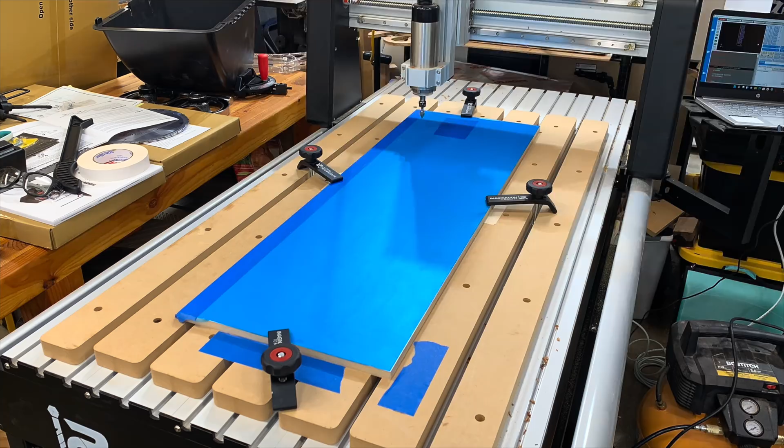So the biggest factor with MDF is priming and really painting, right? It absorbs so much paint so quickly. You're just gonna have to keep sanding, repaint, reprime it. That'll take you some time, and it's also weather dependent. Then at this point, I'm adding some masking. I'll talk more about this Oramask material later in the video and some considerations, but it really does a great job to help get a really crisp line. And then here I am loading up the machine, loading the file, and then carving away.

The other thing about MDF is it is the biggest offender when it comes to sawdust. I didn't have the dust shoe or the boot hooked up here, and it was just fine. You're just gonna have to keep an eye on it, but just be aware of that, right? But it cuts super clean. MDF cuts really well. There's not too much sanding that's gonna be required afterwards.

It is a very inexpensive material to use, and so it is preferred by a lot of folks, but some extra work with painting. And so here I'm just doing a quick clear coat, then adding some more of that filler primer, and then adding my color, some black. Make sure it dries, let this all dry before you peel it off.

But here I am peeling it off. This is super satisfying. You're gonna see how crisp those letters are, and it just really cuts so well. Downside is when you rush a job and you don't wait for the paint to cure and then peel the plastic and the masking off, you ruin the paint job like you see here.

And so at this point I'm like, awesome, super. But I just forged ahead and pulled off all of the masking with the little tool here, made quick work of it. And to see what I got, I decided to pivot, and I just went rustic. That's what woodworkers do, and so I distressed it a little bit more, did some more sanding, and I went ahead and called it rustic.

This was a practice project after all, and you know what? It turned out okay. It wasn't what I was going for, but it was a decent look. So if you're going for that rustic, weathered look, rock it this way, and so that's an option for you. But it did turn out rather nicely. I'm a fan of how it looked with a nice frame.

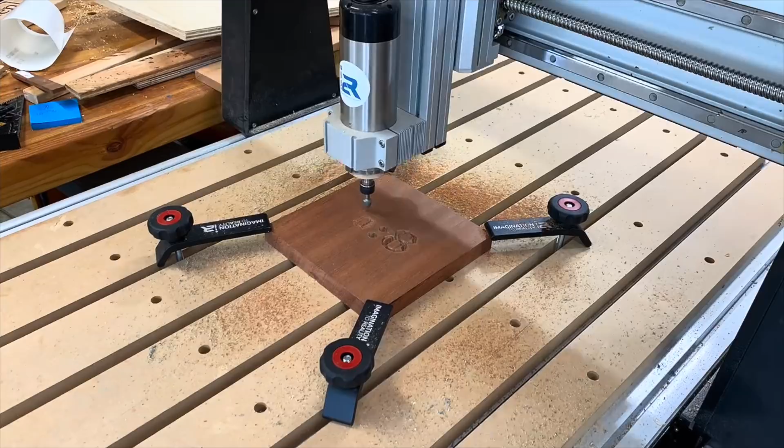Using hardwoods. Hardwoods are amazing, and that's really what I envision myself doing mostly. And so here I've just got a piece of Jatoba, Brazilian cherry, and it carved out really nicely. And because these hardwoods are hard and dense, the grain structure, there's not as much sanding required. You're probably going to need a wire brush just to get some little nibs and little particles there, but it cuts super clean right off the machine bed.

And then go ahead and lay a clear coat down. This is really important if you're going to add any spray paint. You want to seal the grain. And so now that I've sealed the grain with the lacquer, now I can flood it with black. Same thing here. I'm going to seal all of the grain with a clear coat, just some kind of lacquer, and that way my paint color is not going to bleed into the wood grain and not come off.

Now that it's sealed, let it dry. Now I can flood it with whatever color I want. So here, going with white, or the other one with black. And so flood it. Make sure you wait for the paint to dry. Once that paint has dried, then you can go about sanding. If not, you're going to get some of that sawdust in there.

Here I just paused to show, again, you can make it look rustic if you want. This is a look for some, not for me. But if that's what you're going for, you could kind of make it look a little rustic, that is an option. But if you have a good sander, this doesn't take too long. You could use a drum sander, but then you have to mess with lines. So this didn't take too long at all, and it really does turn out rather nicely.

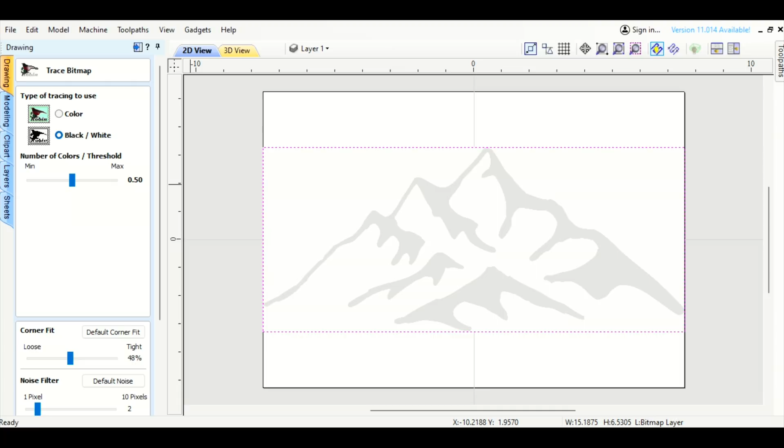And once I've got my mountain, I want to do this feature right here. So this is called Trace Bitmap. So right on over here, I'm going to click Trace Bitmap. And so the value of black and white, it's just that much easier. You can do color. Plenty of tutorials online how to do color, but I got my black and white clicked. Scroll on down, click preview, and then you can see I got my vectors. Click apply, close, good to go.

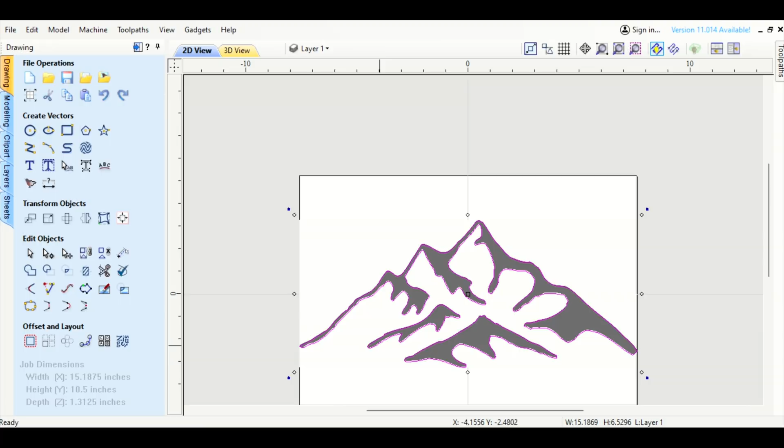Sometimes when you do this, you're going to get some weird little things, so you can zoom in and see if you have extra little nodes or whatnot that you can delete. Looks like I'm good here. But for my piece, I want to have both a picture and text. So I'm going to hold down the shift key so it's centering the picture, and I'm going to resize it. I already got my vectors, so I'm just going to get this out of the way. Good to go.

And we're going to go slower, you know, because the people are watching. There we go. All right.

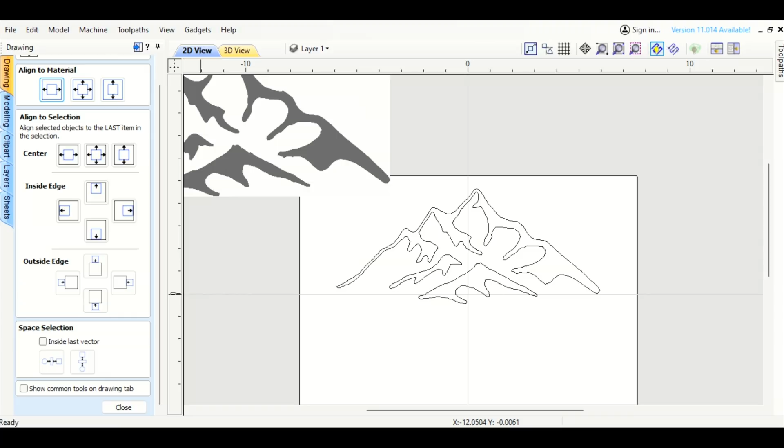And so I'm going to bring this kind of up top. I can recenter right here. Just use this feature to recenter and keep in position holding down the shift key. I'm going to make it a little bit bigger, and then let's bring it down just a skosh. Or let's not, because we're just going to jump ahead. All right, then I'm going to add in some text. So here we go.

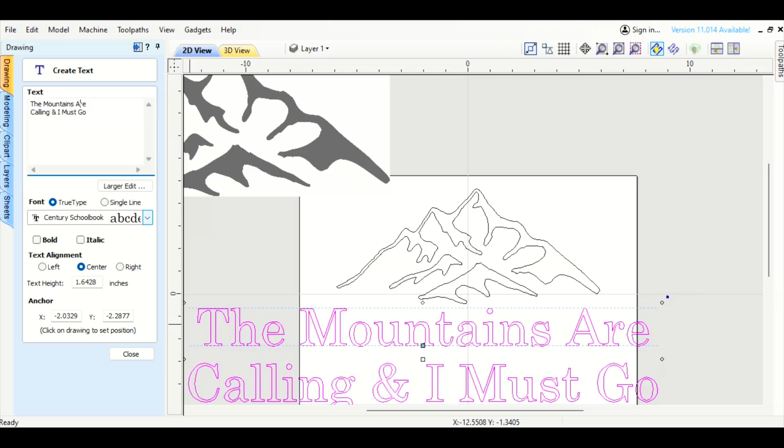We'll say "the mountains are calling, and I must go." So a little John Muir quote here in the Pacific Northwest. You know what? I'm happy with that font. I can change to a different font if I want, but you know what? I like it. I'm good with that.

Obviously, I need to resize. There are other ways to resize, but I'm going to go ahead and zoom out so I can see it. I'm going to shrink it, center it. Actually, I'm okay with this size. So this is just the image file. I'm gonna just delete it. I don't need it. I just need the vector.

And let's zoom in. All right, the mountains are calling and I must go. I'm happy with that. So I could then add in other features here. I could add in borders, but this is just simple for a tutorial. I'm going to click on the text and I'm going to do a VCarve toolpath. So then I click on toolpath and click on VCarve.

I've been using the 60-degree bit. You could certainly do a 90-degree bit. You would just select whatever you want. Start depth, I'm just going to leave it as is, 0, not messing with anything else here. That's all I have to do. Then I'm going to click calculate, and it's just going to run it through.

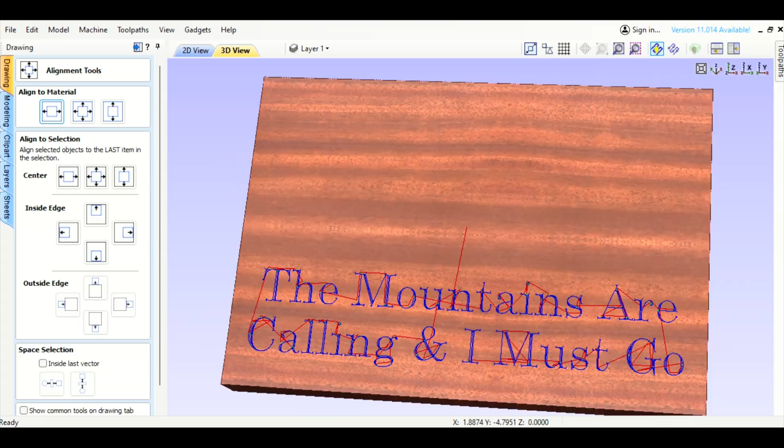It jumps into 3D carving mode so I can see what it looks like. Looks fabulous. So I'm going to go ahead, close. Not that I need to, but I'm going to rename this as text. All right, let's go back to 2D mode. And now I'm going to click on my picture. With my picture, I still want to do a VCarve, but I want to show you some other options. Under toolpaths, I could do a VCarve, which is what I'm going to end up doing for this piece.

But you could, like I mentioned earlier, use one of those other bits, whether it's the ball nose or the downcut bit. And then I would hit the pocket toolpath. I already have it in here. It's an end mill 1/16 inch. That's my downcut. I've set cut depth 5/100ths of an inch, so it's not going to go super deep. That way I get that nice pocket nice and clean, like I showed on that Star Wars sign earlier. That's how I did it, and then I would just click calculate, and it would calculate what it would look like.

However, I am going to show that VCarve option. I said earlier how I did a lot of this with just the VCarve. Still got the right vector selected. I could click flat depth. All of those Seattle sports signs I did, the Mariners logo and whatnot, I clicked flat depth. What that did is it didn't keep going until the full VCarve bit went all the way down to get the full V. I picked, again, like 5/100ths of an inch. So it went down a little bit, but it got flat. It doesn't have that deep recess. So that is an option.

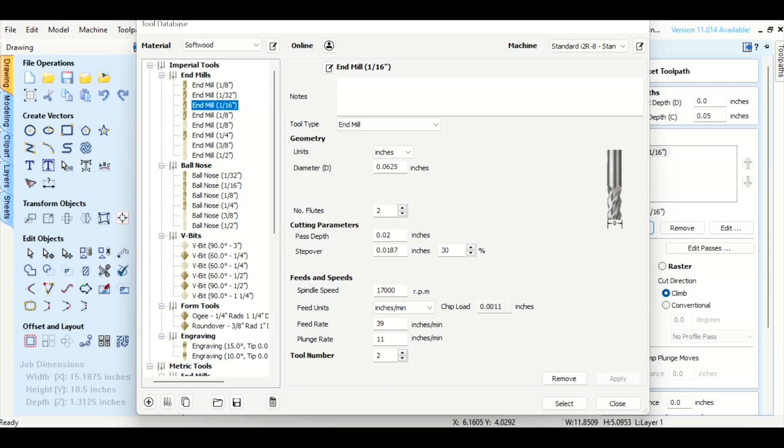Or you could do a pocket toolpath, and then you could select whatever bit. If I want to do a ball nose bit, that looked really clean, 1/16 of an inch, or I can do that end mill, that down cut. Down cut's going to be really clean. Then you would just click select, and again click calculate, and get a better idea of what this is going to look like. Let's go ahead and show it. Preview. All right, so it shows you what it's going to look like here with the profile.

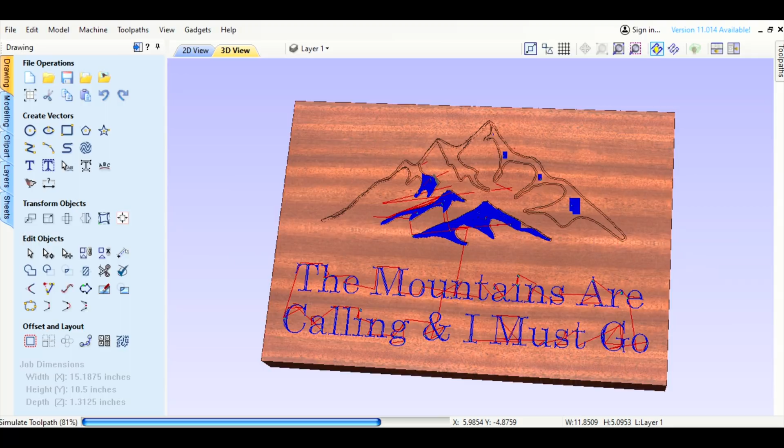So this isn't going to be the deep V-carve. It's going to be just a flat. It's really simple, pretty straightforward. And that's what it's going to look like. I can mess around with it if I don't love the look, and it just gives you a feel for it. So there you have it, a quick little tutorial on VCarve.

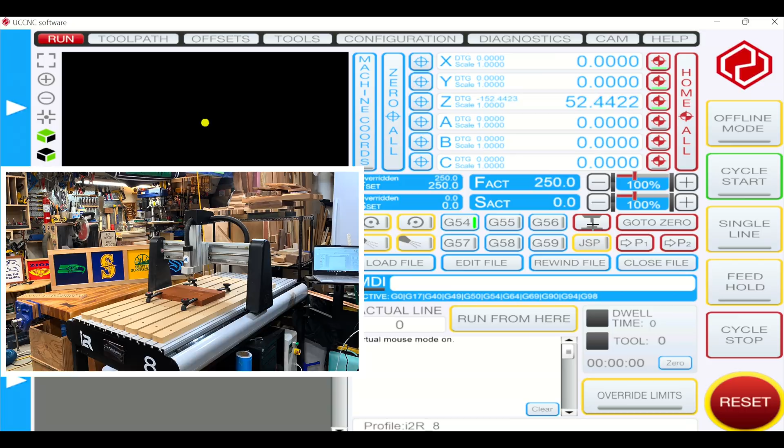So if this sounds way too much for you and it's overwhelming, it's really not. I'll do some more basic videos in the future if you're new, and don't be daunted by the project. But once you get everything set up, then you just have to find your program, and that's it, right? You load your program that you already did in Vectric. This is the one we did earlier.

And I load it, and normally you would check your toolpaths, you would do all of that. I'm not going to do that here. You're not going to see it, but I've loaded it, and now I'm just going to hit run. And so then you just stand back and watch your machine take off. And really, UCCNC is great to be able to control everything from the computer. That's one of the things the i2R machines have that not a lot of other units have. So I'll talk more about that in the future.

But here is that one that we designed together. And here it is carving. And so here, oh my gosh, this is just a piece of construction grade fir. We have the V-bit. This is the 60 degree, so it got really deep in here, but I had the thickness to handle it. But this just shows a piece of wood that got stained and what it looks like with contrast. At this point, I could just leave it like this. I could finish. You could also do some masking and paint it white for that offset as well. But there you go.

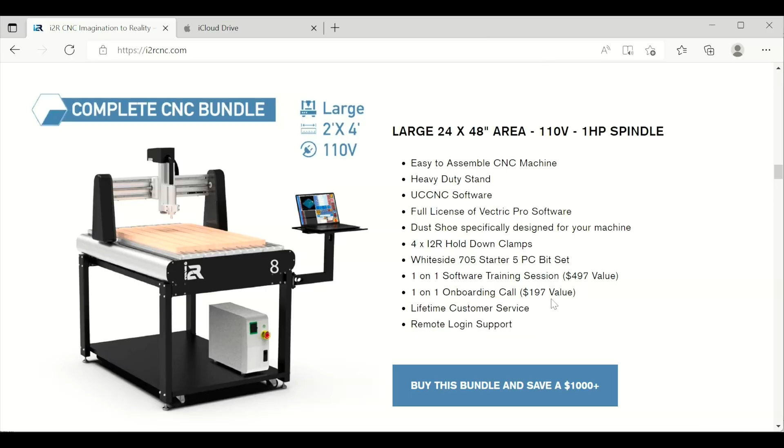All right, there you have it, a semi-comprehensive introduction to sign making with a CNC. Great beginner project. So if you don't have one yet, I'm going to be doing some more CNC videos, really exploring all that this machine can do, and there's so many possibilities. I'll be getting back to a lot more hardwoods, which really is what I do.